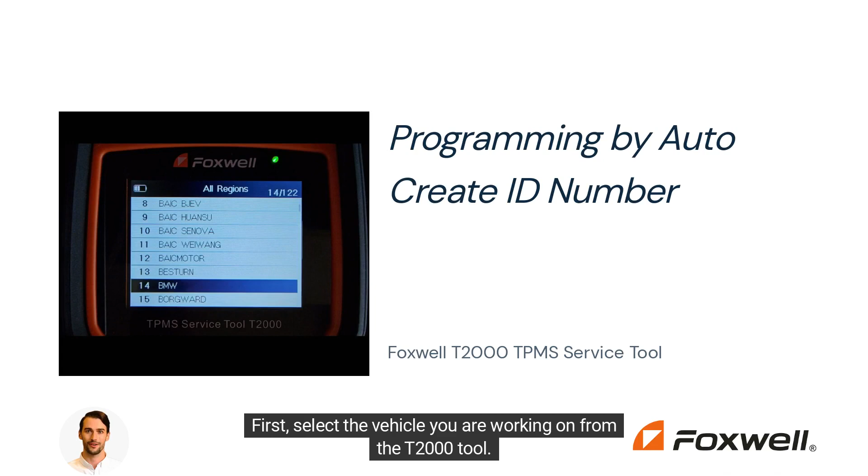Automatic create. This function is best to use if the vehicle you are working on is auto relearn or does not have any complications with position relearn procedure. First, select the vehicle you are working on from the T2000 tool. It is crucial to choose the correct year and model of the vehicle. Prepare one or more Foxwell Universal sensors and place them in front of the tool. The Foxwell T2000 tool allows you to program up to 16 sensors at a time.

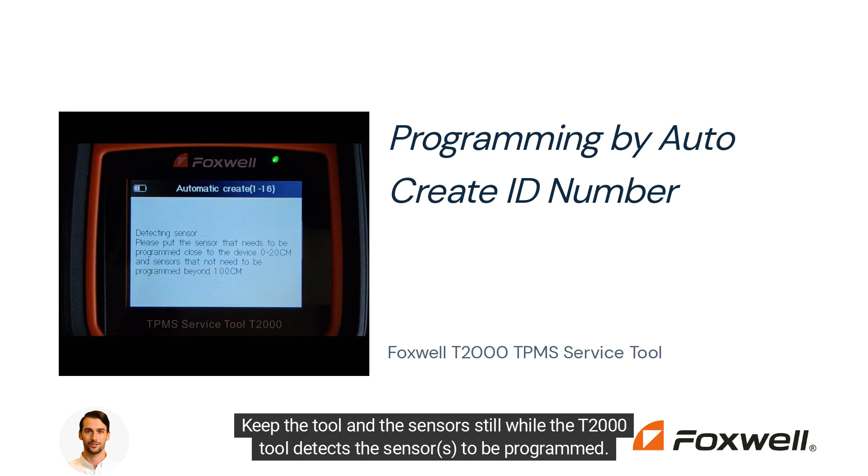On the next page, select the Sensor Program option and then choose the Auto Create 1 to 16 option. Keep the tool and the sensors still while the T2000 tool detects the sensors to be programmed. If the tool correctly identifies the number of sensors to be programmed, press the Yes button and continue holding the sensors in front of the tool. If the number of detected sensors is incorrect, make sure there are no other Foxwell sensors nearby. Remove any other sensors and try again.

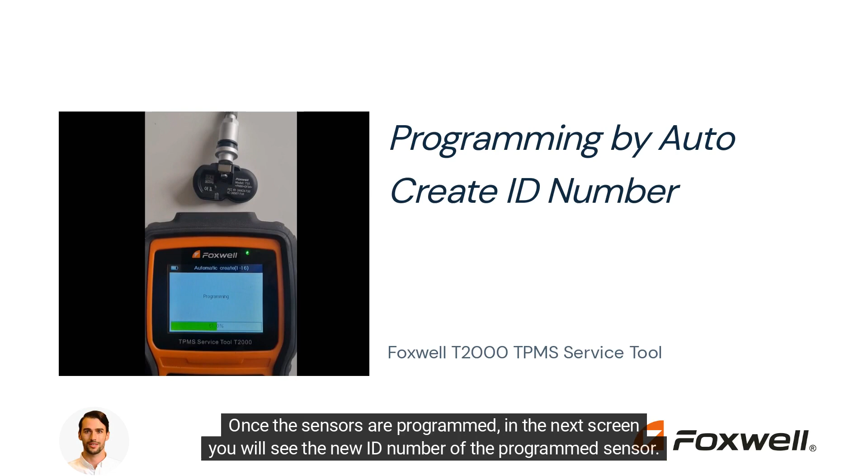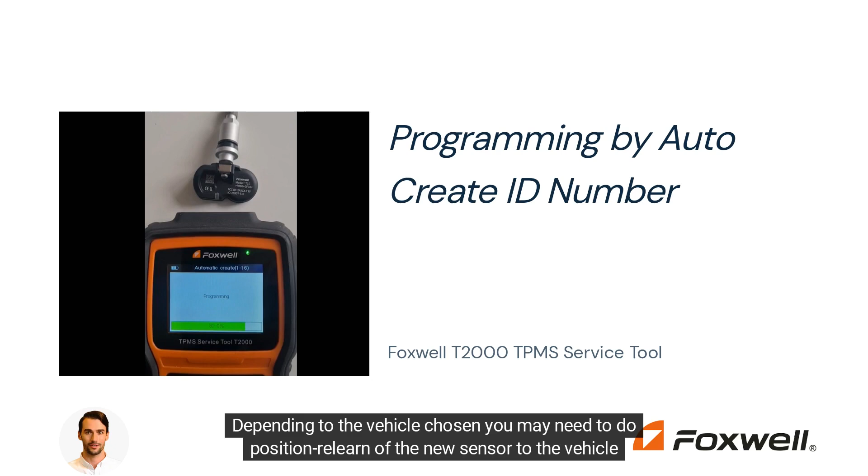Once the sensors are programmed, in the next screen you will see the new ID number of the programmed sensor. Now this sensor is ready to use in the chosen vehicle. Depending on the vehicle chosen, you may need to do position relearn of the new sensor to the vehicle ECU. To learn more about position relearn types offered by Foxwell T2000 tool, you can watch our other training videos.

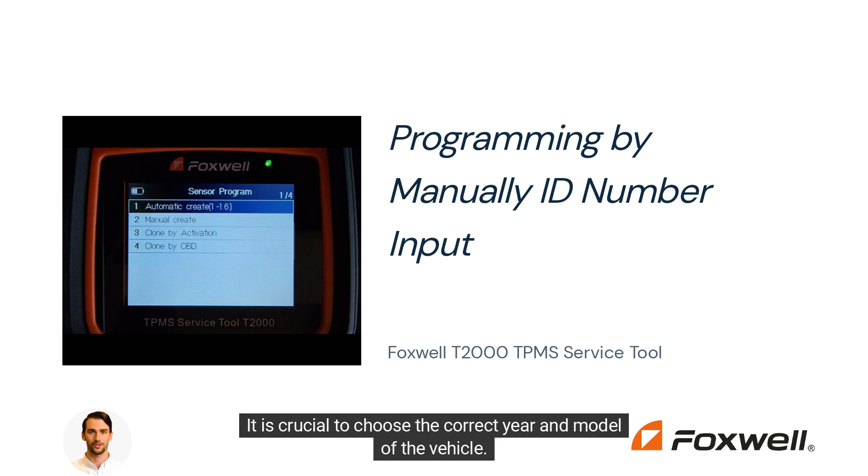Manual create ID number. This function is best to use if you have the registered ID number of the broken sensor on hand and if the vehicle is complicated to register the new sensor ID number to its ECU. First, select the vehicle you are working on from the T2000 tool. It is crucial to choose the correct year and model of the vehicle. Prepare only one Foxwell Universal sensor and place it in front of the tool. In this function you can create one sensor in each input.

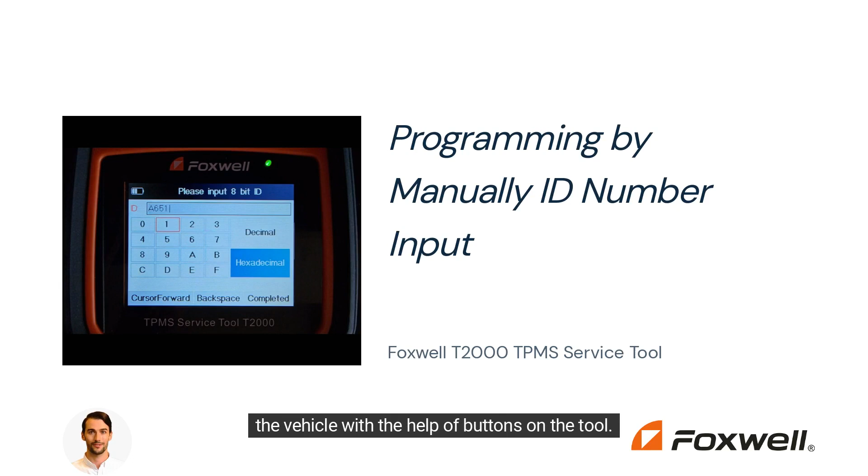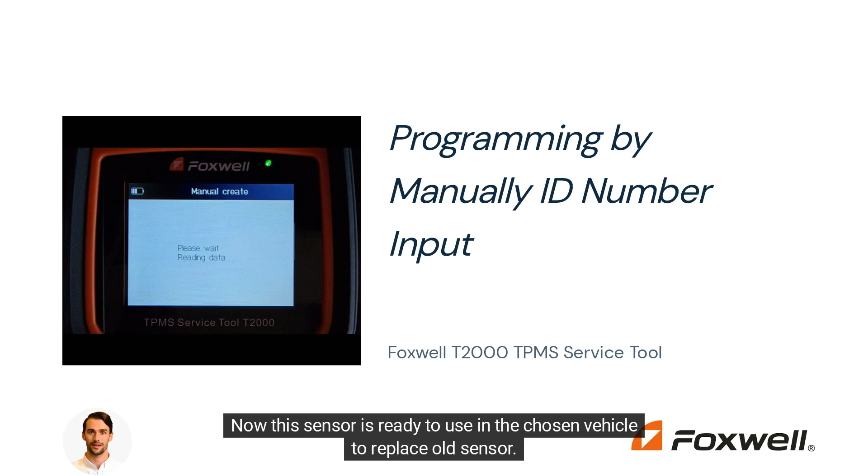Now you can select from the Sensor Program menu the Manual Create option. On the next screen you will have a space where you can manually enter the ID number written on the old sensor of the vehicle with the help of buttons on the tool. Once the sensor is programmed, in the next screen you will see the inserted ID number of the new programmed sensor. Now this sensor is ready to use in the chosen vehicle to replace the old sensor. As you program the missing broken sensor's ID number, this new sensor should work in the same way as the cloned previous broken sensor.

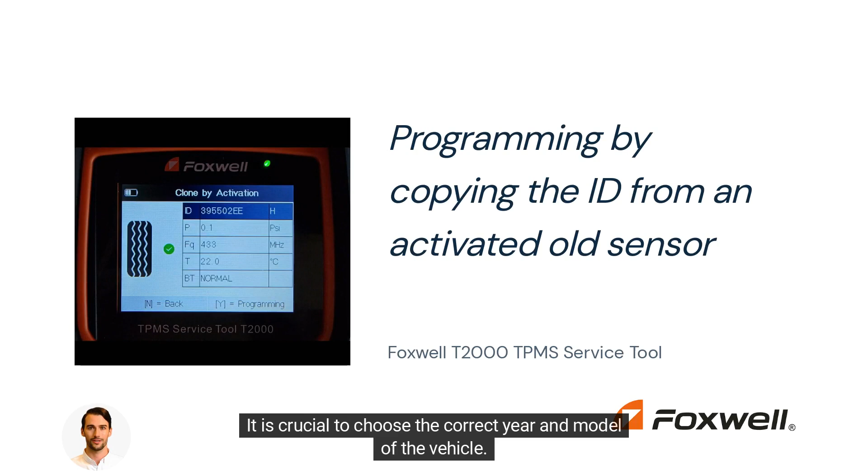Clone by activation. This programming option is best used when cloning a set of sensors for winter tires or when the old sensor to be replaced can be scanned with the tool. After cloning the old sensor, make sure that you do not keep the old sensor in or around the vehicle. Having the same sensor ID number in 2 sensors can confuse the vehicle's TPMS system. First, select the vehicle you are working on using the T2000 tool. It is crucial to choose the correct year and model of the vehicle. Prepare only one Foxwell Universal sensor and place it in front of the tool. In this function, you can create one sensor in each input.

Now, from the Sensor Program menu, select the Clone by Activation option. You will see a screen with empty sensor information. In this screen, please scan the old sensor that will be cloned. Then, the sensor ID information will appear on the screen. Place the new sensor to be programmed and keep it still until the programming is complete. Once the sensor is programmed, you can now use it to replace the old sensor.

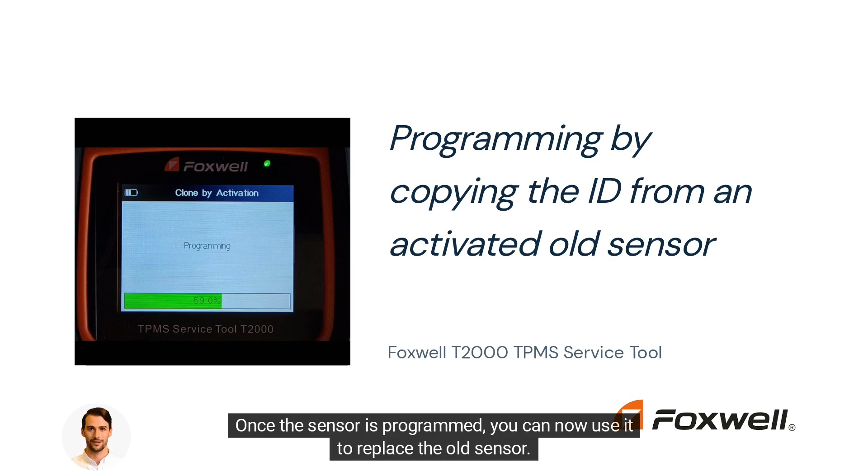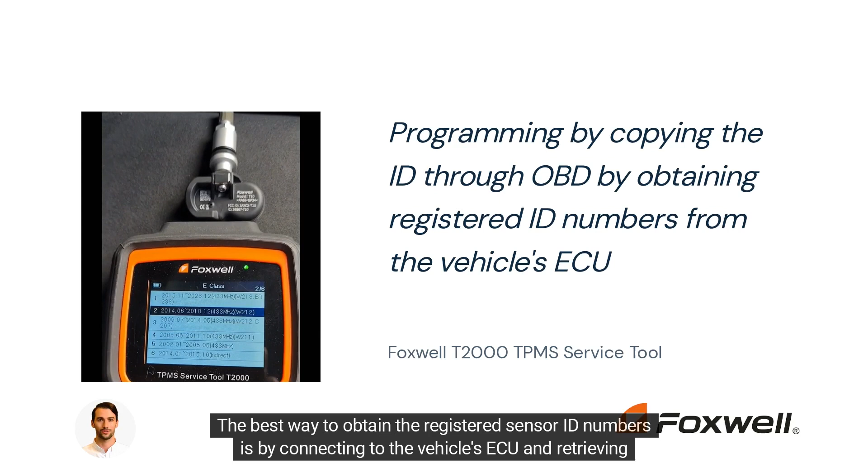Clone by OBD. This sensor programming function is best used when you have one or more faulty sensors in a vehicle. It is always advisable to program a new sensor with the registered ID number in the vehicle's ECU. The best way to obtain the registered sensor ID numbers is by connecting to the vehicle's ECU and retrieving them. First, select the vehicle you are working on using the T2000 tool. It is crucial to choose the correct year and model of the vehicle. Prepare only one Foxwell Universal sensor and place it in front of the tool. In this function, you can create one sensor in each input.

Connect the T2000 tool to the vehicle's OBD2 port using its connection cable. Engage the hand brake, turn on the ignition, and keep the engine off. Now, from the Sensor Program menu, select the Clone by OBD option. After connecting to the vehicle's ECU, the next screen will display the registered ID numbers in the vehicle's ECU. Use the arrows to choose the necessary sensor ID number to be copied and press the Yes button. The tool will detect the new sensor and program it with the selected ID number. Now, this sensor is ready to be used in the vehicle as a replacement for the old sensor with the same ID number. This way, there is no need to register the new ID number with the vehicle's ECU.

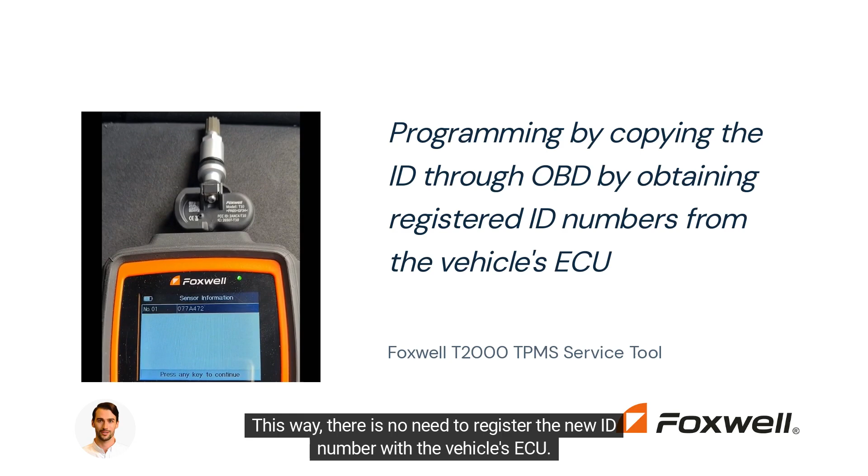In this video I explained to you how and which ways you can program a Foxwell Universal TPMS sensor with a Foxwell T2000 tool. You can also use other TPMS tools or TPMS featured diagnostic tools offered by Foxwell to program a Foxwell TPMS sensor.